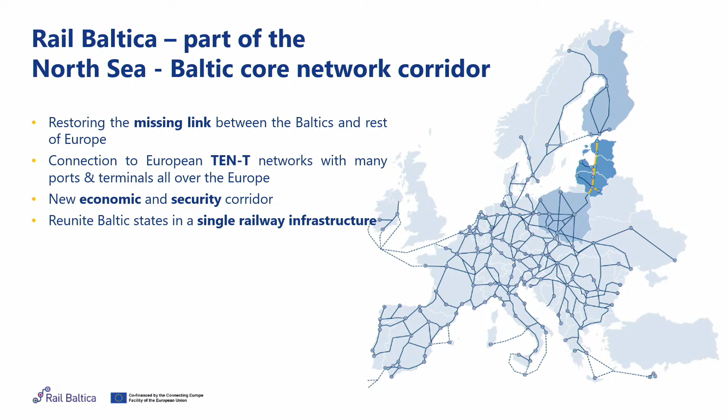The idea has been in the big politicians' heads for a long time, but now, as Anvar said, the project is progressing at quite a fast pace.

To be more specific about the scope in Estonia: we're building a high-speed railway, the first of its sort in Estonia and in the Baltics. The length of the track is 213 kilometers.

It will be constructed as a single track for the first phase, but the project is designed so that in future it is possible to build a double track as well.

In Estonia's scope, we will have two major passenger terminals, located in Ülemiste and Pärnu. There will be a Muuga freight terminal built, and two infrastructure maintenance facilities, which we call IMFs, constructed in Pärnu and Soodevahe.

If we talk about dry ports, we have done the preliminary designs to build them in phase 2, but these will not be constructed in phase 1, for your knowledge.

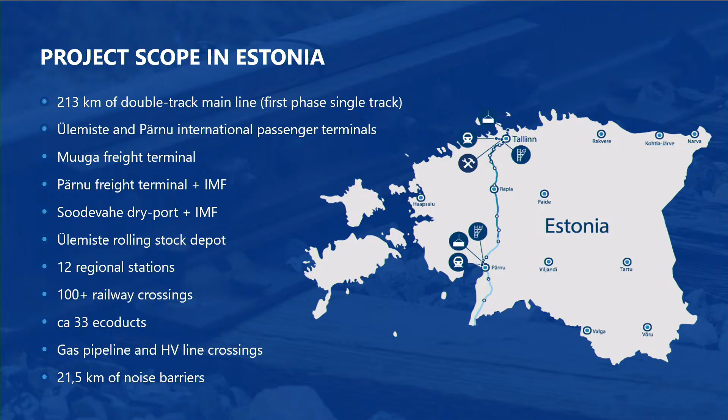The Ülemiste rolling stock depot, which will maintain all the rolling stock in the future, is going to be built in phase 1.

We will have 12 regional stations, and all the stations will be built in phase 1, but with a reduced scope. Reduced scope means the buildings themselves will be a little smaller and the parking lots a little smaller, but there is always a possibility in phase 2 to build them on a larger scale than at the moment in phase 1.

100 plus railway crossings, 33 ecoducts, a lot of crossings with utilities, and 21.5 kilometers of noise barriers—these are the general figures that will be included in the Rail Baltica phase 1 scope.

A little bit about the progress, where we are at the moment. Actually the mainline construction has now started, and I will show you the pictures in the next slides.

During the period of 2019 and 2025, the emphasis was to build all the crossings, viaducts, ecoducts, and utility crossings, and over 30 of those were built during that period.

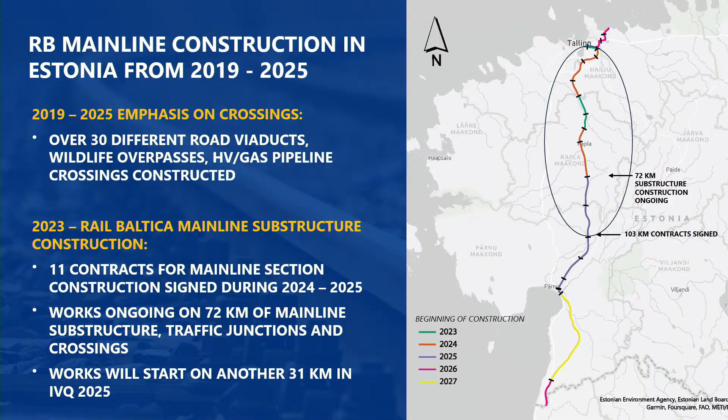Another 31 kilometers of works will start in the fourth quarter of 2025. So by the end of this year, more than 100 kilometers of substructure construction will be ongoing.

The construction itself takes 3 to 4 years, varying according to the sections and contracts. But by the end of 2028, we will have the main line, at least in the top part, ready.

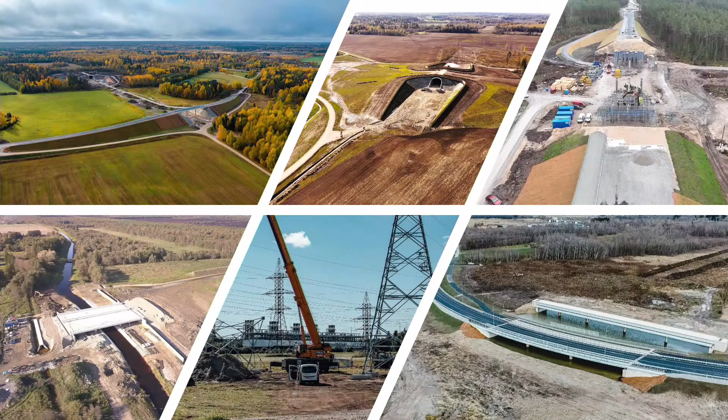Here are some illustrations of what we have done already in Estonia. You see the crossings, the ecoducts, and also the mainline construction that's already been done.

Here's a picture not far from this location. This section starts from Ülemiste and continues to Soodevahe. It's a 4.8 kilometer section, and here you see the mainline construction is ongoing.

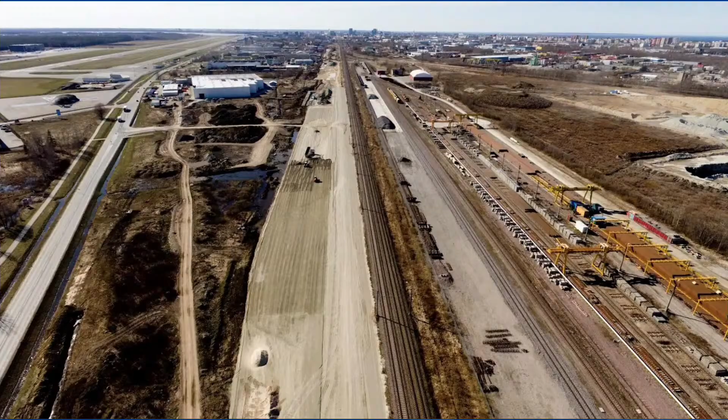To give you another idea of our progress: if we take a section we call Rapla Third, you already see the mainline embankment works actively ongoing, with piling works and so on underway.

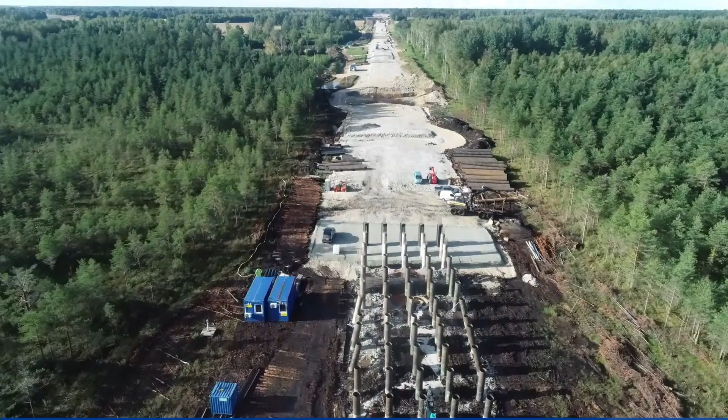In that 100 kilometers, we are progressing very well, but we still need to progress in the sections that come after those 100 kilometers. That's why we chose this alliance strategy to cover all the sections which were left without contracts yet.

This is the first glimpse of the results of this big procurement. We have signed 2 contracts: one is for Alliance 1, which we call OnEst Track, and the partners are named here. Hopefully Laura will explain more in detail later on.

The scope of the Alliance 1 OnEst Track is to build the superstructure from top, from Ülemiste till Pärnu, and to build substructure from Tootsi to Pärnu, which is that small bubble down there. So its superstructure works is 142 kilometers, and the embankment works, or the mainline substructure works, is 36.6 kilometers. The contract value without purchasing the strategic materials is approximately 400 million euros. Without strategic materials, we're talking about rails, ballast, sleepers, and turnouts.

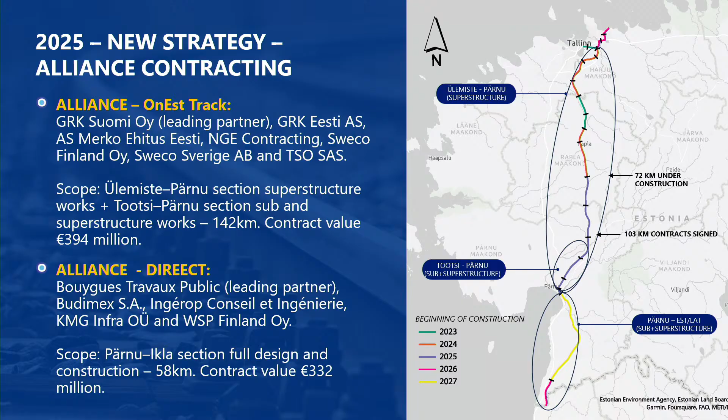In the Pärnu International Passenger Terminal, the procurement will be launched in 2026 for the building itself, but all substructures, I mean the platforms, will be built by Alliance 1.

I talked about the regional stations. In terms of regional stations, there will be a separate procurement to build all the outer areas and the buildings, but the platforms will be built by the alliances.

Muuga Freight Terminal will be procured by a separate procurement, and there will be a separate construction company doing that. This is not inside the alliance scope. The Soodevahe-Muuga section, which is specifically important for freight traffic, will also be procured separately. It's not within the scope of the alliances, just so you know.

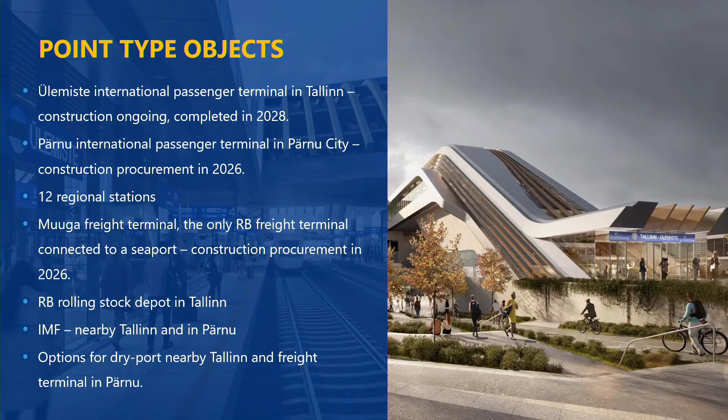To come back to the IMFs, the infrastructure maintenance facilities - these locations initially will be used as construction bases, to store the materials we need, a large amount of materials, to set up a superstructure factory, I mean a rail factory. That's why Alliance 1 is also responsible to deliver the works regarding the substructure and superstructure in those IMFs as well. So just to give you an idea.

In general, we have a lot of work ahead of us. The alliance's scope covers most of the works that we need to do in the Rail Baltica project, but not all, because we are still dependent on the subsystems of CCS and ENE. The CCS subsystem will be procured by RB Rail - the procurement is ongoing. Regarding the ENE contract, it has now been signed, and works regarding the generic design are now on the verge of starting.

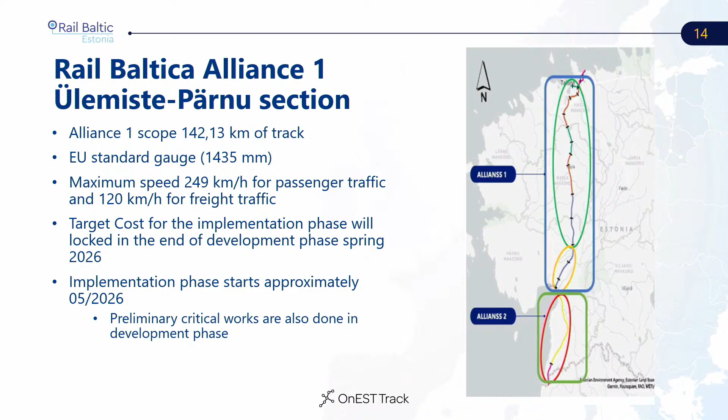So now that we are in the development phase, we are trying to set everything up ready for the implementation phase. The plan is to move on to implementation approximately next year in May. We also have some preliminary critical works identified that we need to do before moving on, including preparation of access roads, melioration works, etc., so that we can start smoothly with construction in May.

Overall view of our alliance: here you can see our working sections. The first 6 sections concentrate on the whole Tootsi-Pärnu section, where we have both substructure and superstructure works. We also have separate sections for Rääma bog and Pärnu Bridge, and Pärnu International Passenger Terminal, which are exceptional objects that require careful planning for construction.

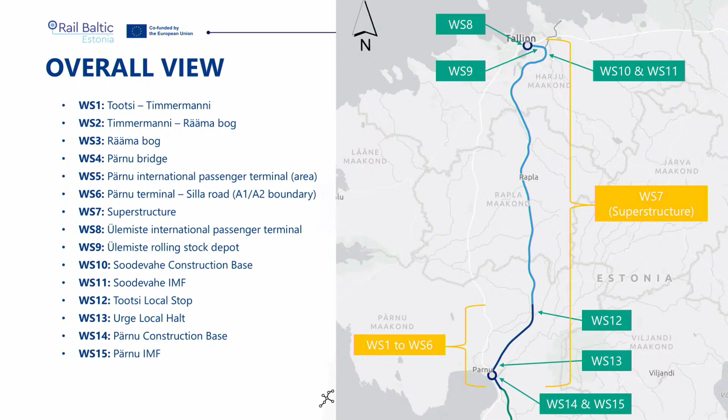Then we also have the superstructure for the whole line in working section 7, and then these point-type objects and other special objects starting from working section 8 - passenger terminals, depots, construction bases, IMFs, local stops, and construction base and IMF also in Pärnu.

Here's more detail about what is included in these point-type objects: the Ülemiste terminal with railway superstructure, Ülemiste depot with superstructure and access roads, Soodevahe IMF superstructure and yard development, local stations with superstructure and station-related works, Pärnu IMF yard development, and Pärnu passenger terminal with station platforms, tunnels, foundations, and structural works.

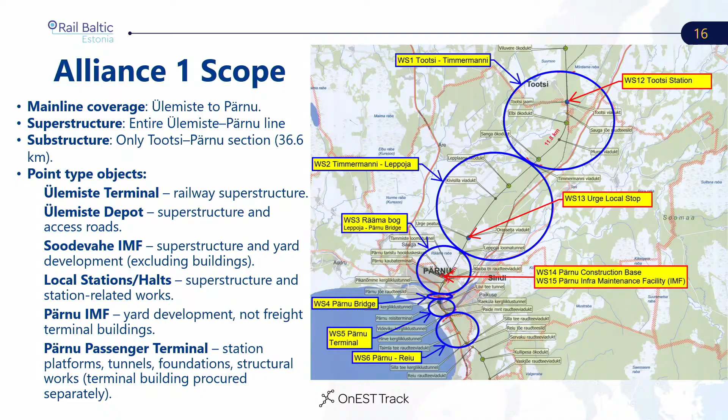So maybe the main interface we've had here is that the superstructure works and railway works related to the mainline are also included in the alliance. This is a change of scope from the previous tender phase, to make both the construction logistics, construction phasing, and construction of the superstructure smooth. So all this superstructure work from Tallinn to Pärnu is included in our scope.

To highlight what works are outside the alliance scope: we have the substructure works from Ülemiste to Tootsi, which were with previous subcontractors or site contractors. Then we have terminal buildings and other construction related to the building itself or the area. These are quite detailed and defined in our scope regarding where the interface lies, but the main rule is that buildings will be in separate contracts later on, which will be taken into account in our schedule and handovers.

Then we also have the CCS and ENE, subsystem design and construction, as separate. As was mentioned before, this interface is really important to succeed in the final target of getting trains running in 2030.

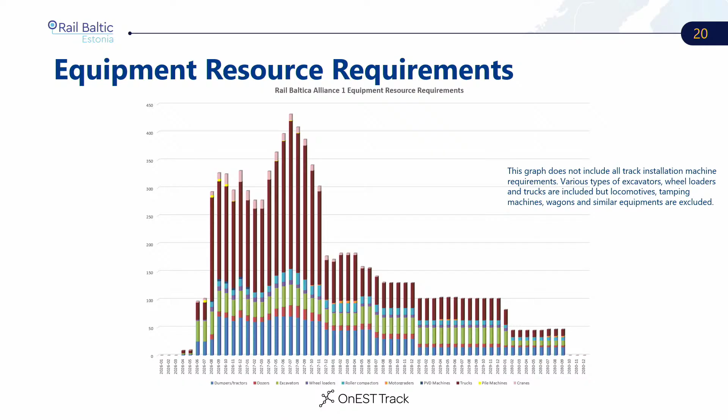For the equipment, the peak is going somewhere close to 400 machines altogether, and this is also for the main machines - the dumpers, dozers, excavators, wheel loaders, roller compactors, etc. So these are also the resource challenges that we are going to have. A positive challenge, I would say.

Here you can also see the division by the teams. In blue, which is the biggest one here in these resource requirements, is earthworks. But the workforce for the next 2 years will be quite evenly challenging for both earthworks and structures. So here you can see the trend: the first 2 years mainly for earthworks and structures, and the next 2 years for the railways.

Then a few words about the procurement principles. First, the qualification process - of course we want all the sources to be duly qualified within finances, ethics, capacity, and resources, and these will be checked during the procurement phase. We also have this principle, best for the project, which we try to follow each day in our work. So if we have alternatives or choices to make, or how we want to do our work, we want to choose what's best for the project. We hope this is also the principle we are going to have in the subcontracts.

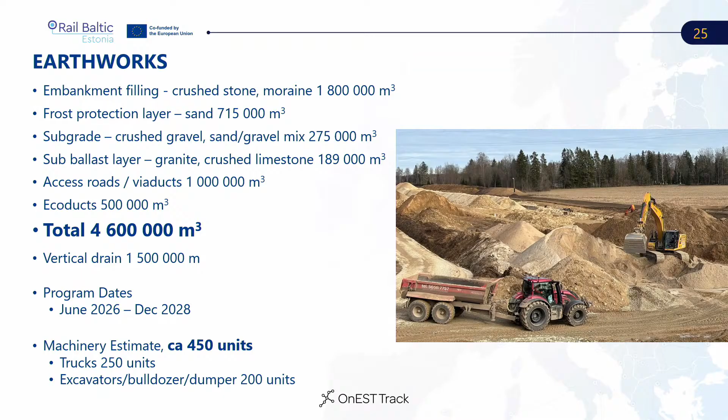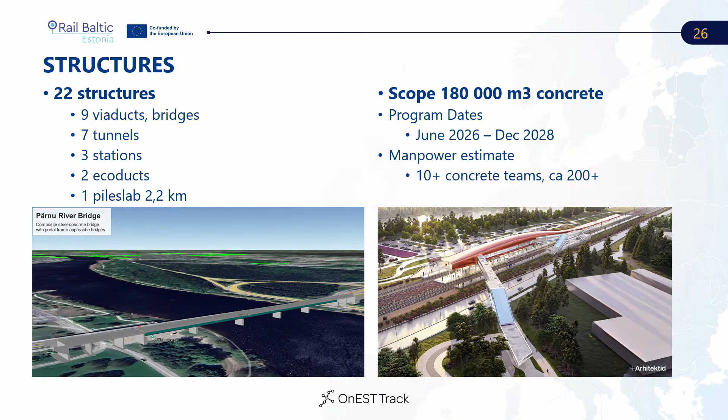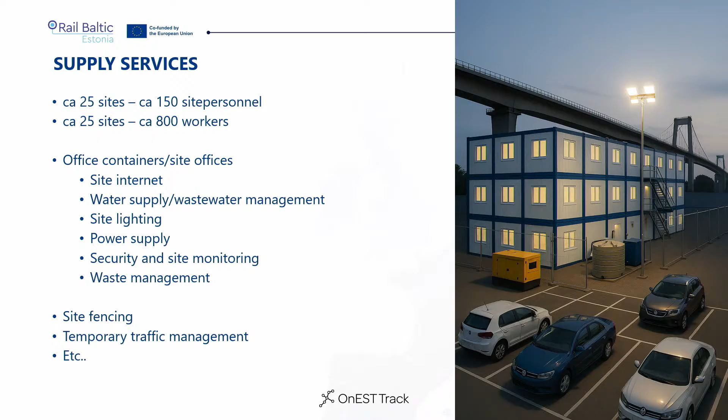With all these resources, both workforce and machines, we also need to plan supply services. How do we handle the logistics? How do we handle the sites? How do we handle the normal daily activities of these workers? Part of the works will be built in the middle of a forest or bogs, so this is something we need to plan - do we have our own camps for the workers, office containers, everything related to that.

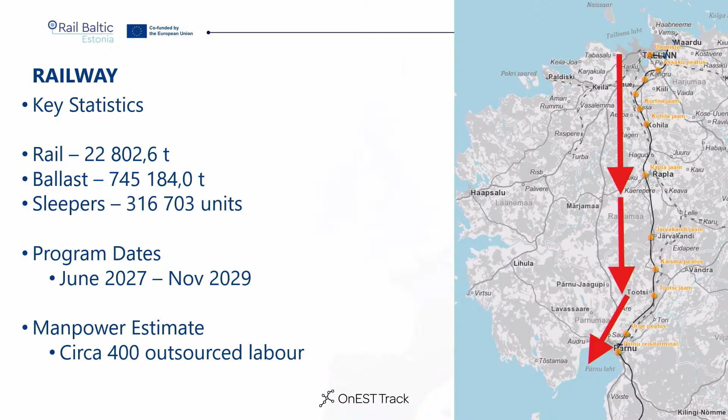Then for the railway as well - it's estimated that June 2027 will see the first railway work start. The amount of rails, ballast and sleepers needed is also quite huge for the whole project, and the manpower estimate needed is about 400 people. Even though we have our own resources, we hope to hire some local resources as subcontractors. All these works need additional workforce and resources that we need to tackle in these procurements.

A few words about the site-wide logistics, just for information if you're interested in delivering materials or machines. We have the main railhead at Soodevahe, close to Tallinn, where we have the ballast, rail welding factory, sleepers, rail wagons and machinery.

We also have planned construction bases and site services worker accommodations at Rapla, Tootsi, and close to Pärnu. In addition, we have storage areas for embankment materials - a preliminary plan to have these storage areas for delivery every 5 kilometers from Tootsi to Pärnu along the route corridor.

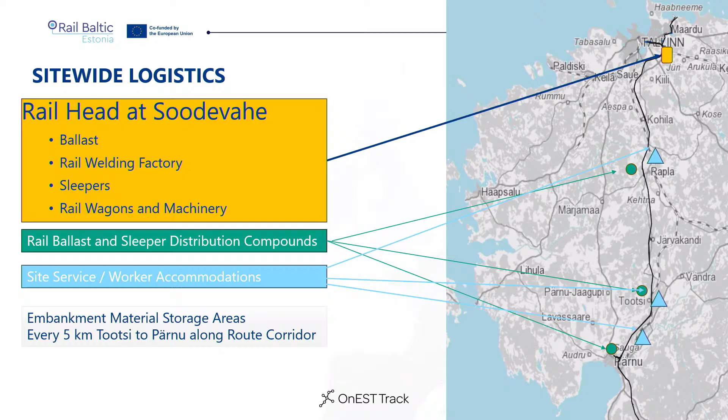I think that was a lot of details already, but hopefully it gives an overview of what kind of resource needs we are having. I hope you have a fruitful day with our experts, with the speed dating and everything, and we will be pleased to answer your questions throughout the day. I hope you have a nice day. Thank you.

Thank you, Laura. It was very educating what we just saw here in the presentation. I'm more than sure the next presentation is going to be just as educating as was the previous one. So I give the floor to the Executive Project Manager of Alliance 2, the section from Pärnu to the Estonian-Latvian border - a lot of different disciplines involved in that section particularly. So Stefan, you're next.

Thanks, Britt. I have a simple life, for several reasons. One is that Laura already covered many things which also apply to Alliance 2, which I will not repeat - that's good news for you. The second good news is that Alliance 2 has a different configuration because we start from almost a blank page. There is nothing built, we don't have much ground investigation data, and we don't have the environmental assessment ready. So we are more in a provisional part.

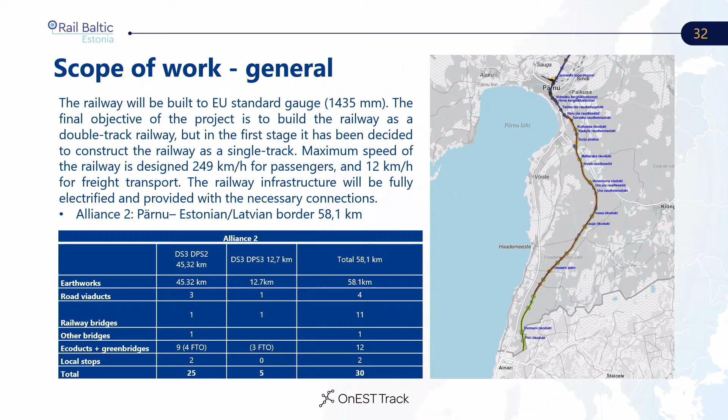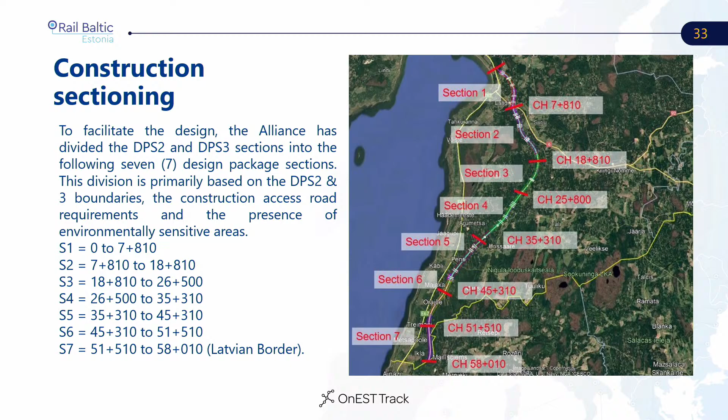Here the system is the same - the same travel speed. It's not 12 kilometers per hour for freight transport, that's just to make sure you're reading - it's 120, of course, just to see if you're reading. Quantities are different; we are in a very flat part, divided into 7 sections. There are no major structures as you'd see in Alliance 1, and there is no IMF - basically we start from scratch.

Big structure schedule: we have a number of ecoducts and bridges. The longest one is less than 200 meters.

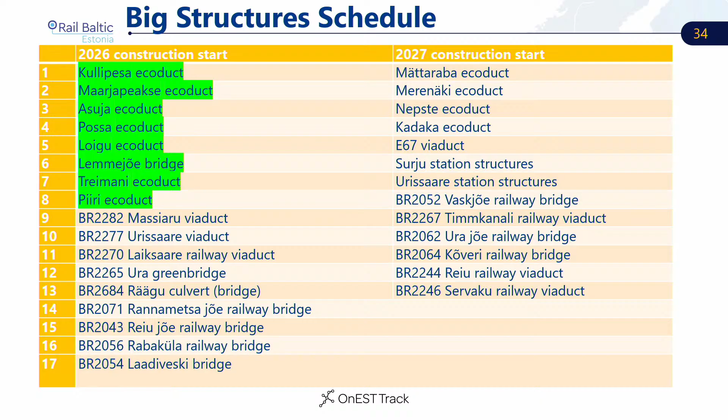Structure types: we have railway bridges, underpasses, ecoducts, and local stops. There are only 2 local stops. We don't call them stations because they are rather small, but they are part of the scope.

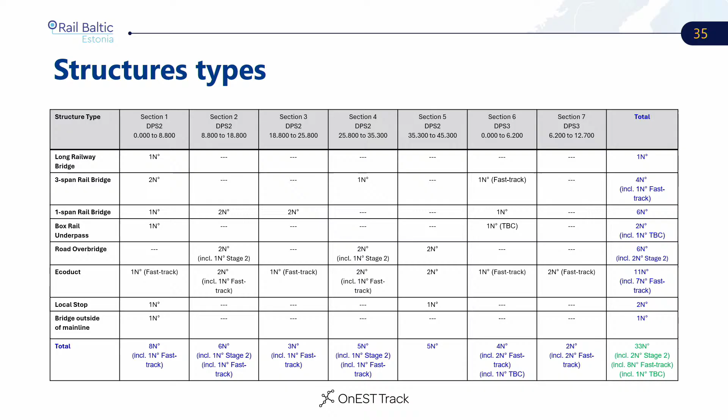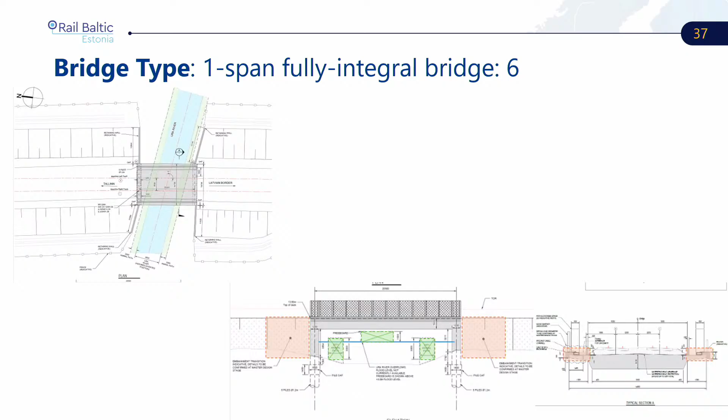I'll start with structures. We have a 3-span bridge, and 6 fully integrated integral bridges, but they are rather short, as you see. Ecoducts, as standard as we can.

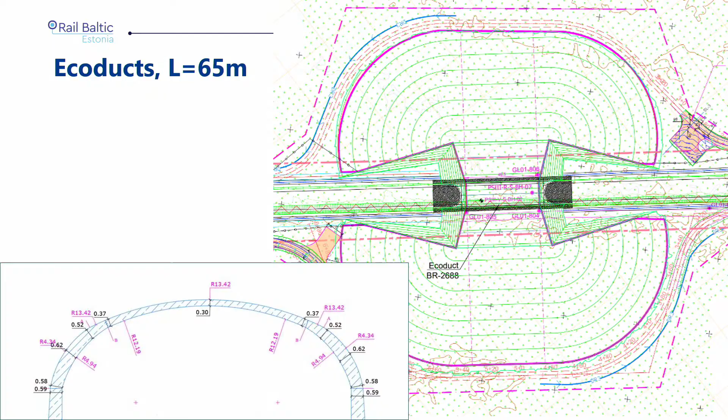I would like to insist on one thing: in Alliance 2, the main challenges are more resources and logistics than technique. We will be operating in a part of the country which is quite flat and very scarcely populated. So we need to build, widen, or strengthen many roads, and that will happen very soon. We will definitely have a problem accommodating the workers.

I will not show you a workforce curve because our planning is still under preparation. Nevertheless, we know the peak manpower should be between 700 and 1,000 people. If you know the geography between Pärnu and the Latvian border, it's very difficult to imagine where they will be accommodated. So there will be major issues.

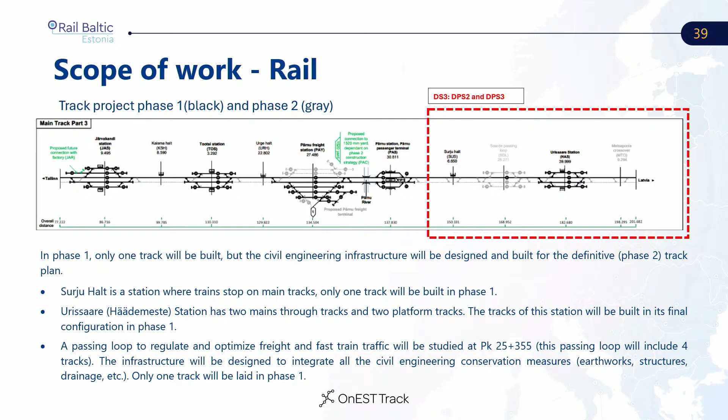For rail, same as Alliance 1, only one track will be built. I will show pictures which are more obvious. So only one track will be built, but we build all the infrastructure for the second rail.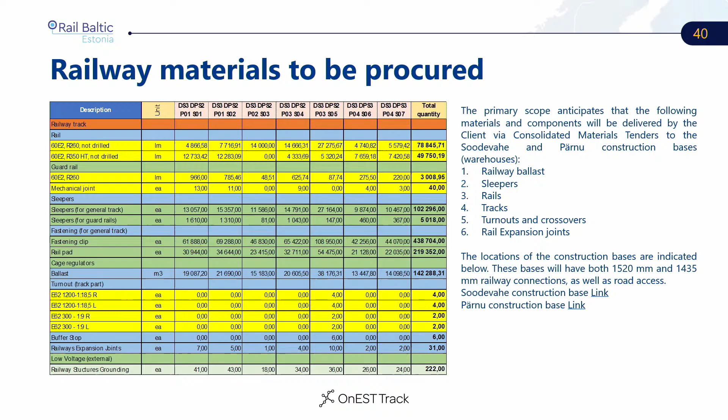Railway materials: 60 kilometers, that's more or less 100,000 sleepers. That's 120 kilometers of rail. I repeat, we're almost everywhere in single track. At this moment there are some framework agreements which were signed or ready to sign by RBE, but we are looking for alternatives, and RBE are interested in listening to alternatives. Very standard rails.

Railway construction program: we start from the end. That's a good planning, starts from the end.

Construction for the rail is once again similar to Alliance 1, but with a major difference: we don't and will not have rail access, at least at this moment, because the only possible rail access would come from Alliance 1, and Alliance 1's rail part will not be ready at the beginning of 2028. That's why most of the work, probably all of the rail work, will be done by truck, and that's seriously complicated.

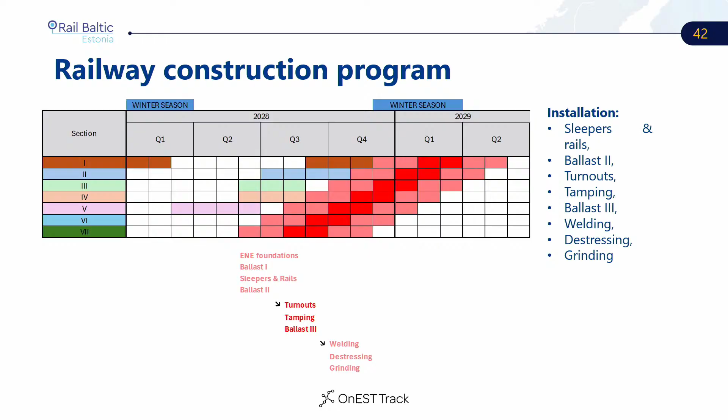That's it for this. Some slides are missing. It seemed that some slides were missing.

In the meantime, I will repeat one thing which Laura said: we don't go necessarily for the cheapest, and by far we look for the best for the project.

The Alliance 2 is... this, we say, yeah, but there are other slides which disappeared, it seems.

Alliance 2 is a joint venture of 5 companies: 3 construction companies, 2 design companies. We work on the basis of unanimous decisions. All decisions are unanimous between the 6 entities, that is the 5 service providers plus RBE.

Once the decision is taken, one of the 5 entities places the order. It's exactly the same as Laura mentioned for Alliance 1, exactly the same principle. The joint venture, the alliance, is not a legal entity, so you will get orders from one of the 5 entities.

What else should we say regarding quantities? While we are trying to find out where the slides disappeared.

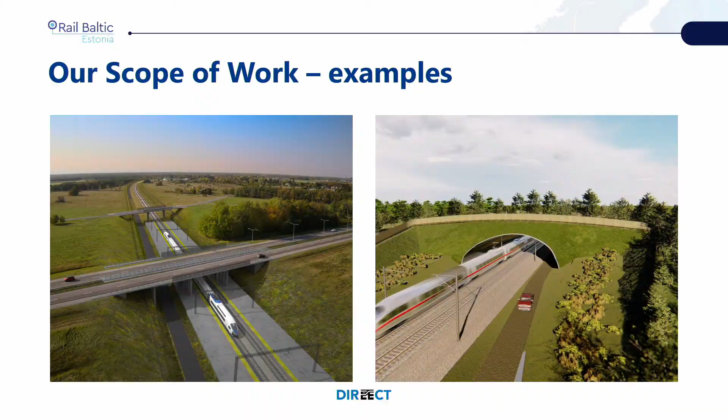I would like to insist on standardizing and prefabricating. Why? Once again, we have a logistics and sourcing aspect which is very important in Alliance 2. The more we prefabricate, the more we standardize, the simpler the sourcing problem will be.

Development phase is similar, the schedule is similar to what Laura said in more detail. We have been working on design optimization based on the value engineering we received from RBE. We spent 3 months optimizing it, and it ended yesterday, so I cannot show you the results yet. Now we are producing the main design, and we will start the request for quotations before Christmas, with the negotiation period during the first quarter.

The land is very, very flat, it's 90% embankments, and we have very unbalanced earthworks. That means for the quarries, we're already in contact with more than 60 quarries for the embankment material. Sections I already showed. We are starting the geological investigation; there is a huge work to be done.

Now the proposed advanced work which we want to start before Christmas or just after: it's the geodesic issue, access roads widening and strengthening, creating access roads, and maybe some storage areas. Once again, we need lots of quarry material. At this moment we are testing the quarries for quantities and quality. Once we have this, we will define when we need to start ordering material from the quarries.

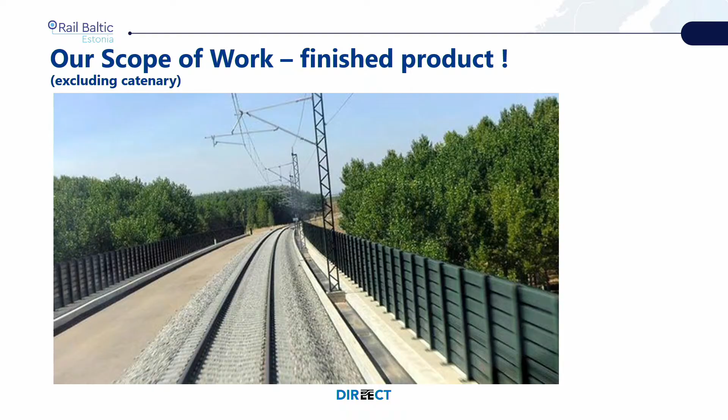And of course, if you talk about E&E, the catenary works will also be reduced in phase one. But in terms of access roads, maintenance roads, noise barriers, fencing - nothing will be left out from the phase one scope, because it needs to be at a level where, if we at some point decide to install the second lane of tracks, it will be quite easily manageable. This phasing will also influence the CCS part, because we don't need to install all this equipment and cabling for the double track.

Did I answer? This picture shows quite well what the intent is - the superstructure excluding the catenary. For example, when we build an access road, we will try to have it on the left side of the picture to facilitate future access, but it won't always be possible, so sometimes the access road will be on the right-hand side.

So we are definitely on a roll with the questions here. Maybe just a couple more at least. Is it okay for you to speak without the microphone, or do you want me to?

Is the design now fully finished? Is it in the construction phase, or is it still the preliminary phase? And are both alliances open for value engineering and optimizing the structures - mainly the questions are about the structures?

Okay, so the question was about the level of the design, and are we still looking for value engineering for the design? The answer is yes.